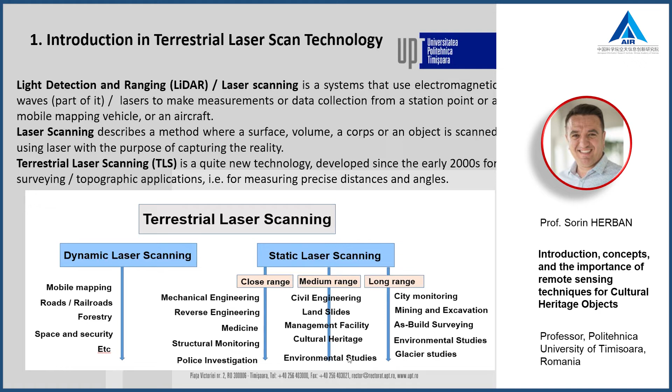And also we have long range, from a couple hundred meters to a couple kilometers. The application in long range are related with city monitoring, mining and excavation, as-built surveying. This as-built surveying can also be linked with building information modeling, and maybe some of you have some knowledge about building information modeling, environmental studies, and also glacier studies.

The principle of laser scanning is very linked to the electromagnetic spectrum. I know that in this part of the course the information is a little bit theoretical, but if you understand this theoretical information, it will be easier for you when you do applications with the laser scan. So please have patience, because it will not last too long. I wanted to give you some information about the theoretical principle of laser scanning.

Physics defines electromagnetic radiation as waves of an electromagnetic field propagating through space, carrying electromagnetic radiant energy. This includes all kinds of waves, starting with radio waves, microwaves, infrared waves, visible rays, ultraviolet, X-rays, gamma rays, and so on. All of these are part of the electromagnetic spectrum.

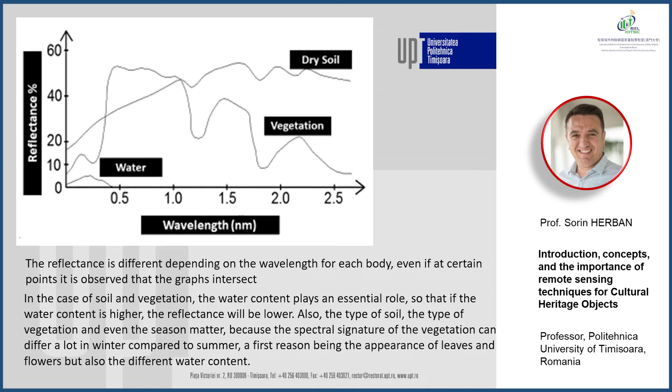So, what is laser? Light amplification by stimulated emission of radiation. Laser was created to generate a wave of light using only a very narrow band of the spectrum. As I told you before, a typical laser emits light in a narrow, low diverging beam with a very well-defined wavelength.

Worldwide, laser is known and it was demonstrated in May 1960 by Theodore Maiman at Hughes Research Laboratories.

Nowadays, lasers are used in a wide variety of applications, including scientific, military, medical, and commercial fields. All of these were developed since the invention of the laser in 1960. Actually, it was 1958 or 1960, I forgot.

Because of recent developments in ICT and sensor technology, light has been used in a number of ways to measure objects. This data-capturing technique integrated in scanners can be divided into categories: active scanners and passive scanners. Passive scanners, I will start with this one, do not emit any kind of radiation, but instead rely on detecting reflected ambient radiation. Most scanners of this type detect visible light because it is a readily available ambient radiation.

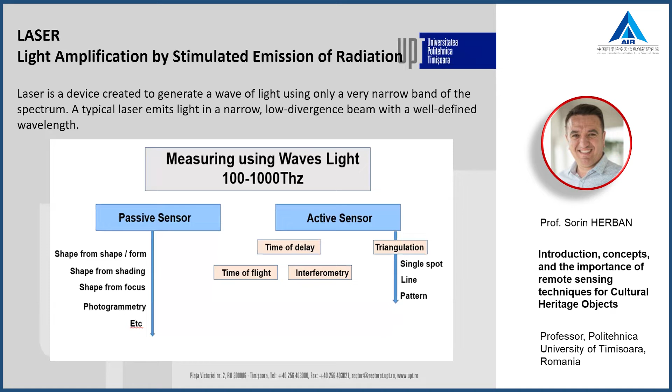Since these active measurement techniques require a laser transmitter and a receiver, they are at least mechanically more complex than passive sensors. The most common sensors integrated in laser scanner equipment are using time-based principles; these are active scanners that measure the time frame between two events. The advantage of using pulses for laser ranging is the high concentration of transmitted laser power.

This power makes it possible to achieve the required signal-to-noise ratio needed for high accuracy measurements at long ranges, from millimeters or centimeters or meters up to hundreds of meters. And nowadays there are scanners that achieve also a couple of kilometers.

The disadvantage is the problem of detecting the exact arrival time of the backscattered laser pulse, due to the changeable nature of the optical pulse and atmospheric attenuation. Active sensors emit controlled radiation.

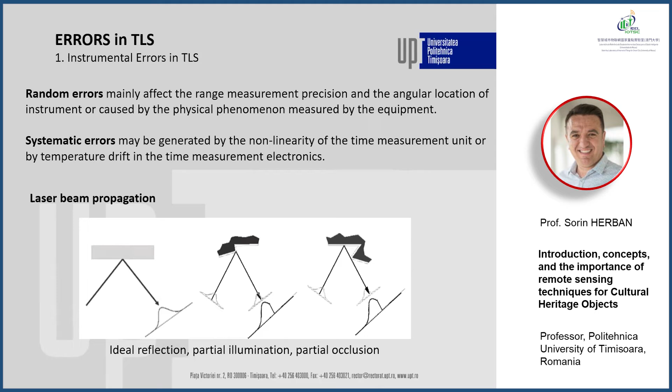First of all is laser beam propagation. Beam divergence is the laser beam widening over the distance traveled. Beam divergence has a strong influence on cloud resolution, as well as the horizontal position of a measurement point. Practically, beam divergence affects the angular location of the measured point, the apparent location of the observation along the center line that emits the beam.

However, this beam divergence can be corrected during the process of processing the point clouds.

Another error that is very common is the mixed edge error. One of the most important consequences of beam divergence is the mixed edge error problem. When a beam hits an object, it can split, or the beam can hit two objects located at different altitudes or different distances between the laser scan position and the object.

One part of the beam is reflected by the first object, and the other part travels further to hit another surface. The result of this can be imprecise information. This error is specific when working with high precision, like less than millimeters. It can also be corrected through the process of cloud processing.

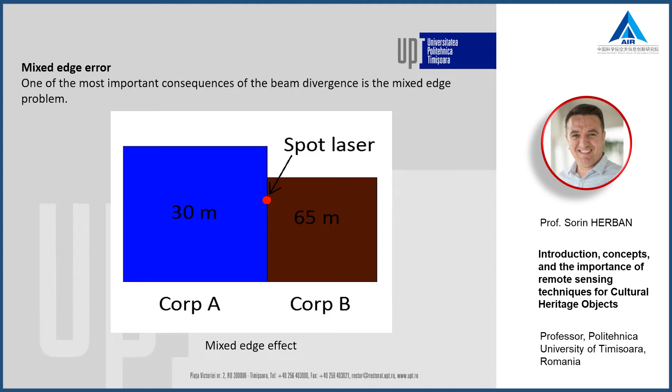Axes can also create errors in TLS. The process of scanning is defined by the following axes: vertical axis, collimation axis, and horizontal axis. Due to manufacturing tolerance, these axes are not perfectly aligned, leading to collimation or vertical errors, as well as horizontal axis errors that can also be present in the process.

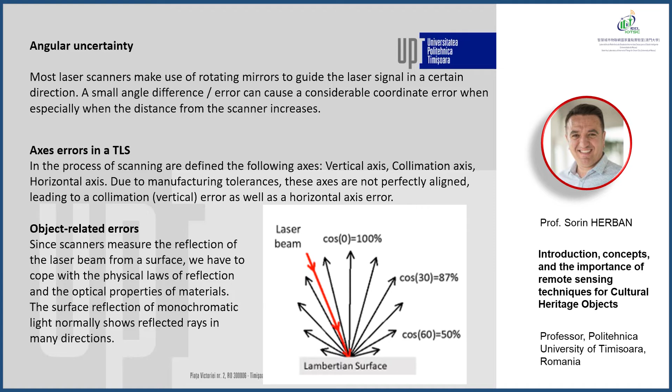Another category of errors relates to the object, or reflected errors on the object. Since the scanner measures the reflection of the laser beam off a surface, we have a couple of physical laws of reflection, actually two, and optical properties of material. The surface reflection of monochromatic light normally shows reflected rays in many directions, as you can see here, and we have the reflection of a Lambertian surface.

In nature, very black or dark surfaces absorb most of the visible spectrum, so the reflecting signal will be very weak in these cases. Hence, the point's accuracy will be corrupted by noise. Surfaces with high reflectance, like bright surfaces, give more reliable and precise range measurements. But not in all cases.

We have a case in my laboratory in Timișoara when we tried to scan an object made from inox or aluminum. In this case, because of the high reflection of the object, the point cloud was with a lot of noise.

The noise is the name of the, sorry, can you hear me? Murad Khan, if you can turn off your mic. Murad Khan. Murad Khan. Okay, okay.

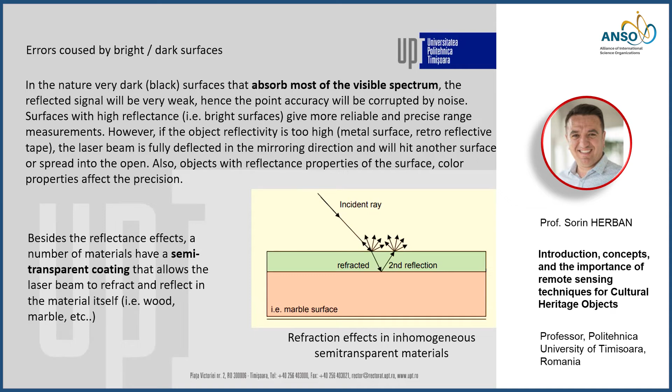Atmosphere can also influence the measurements, and laser scanners will only function properly within a certain atmosphere and temperature range. Even within allowed deviations, measurement errors may be observed, especially in distance measurements.

Laser light velocity strongly depends on air density. However, when the total station or scanner and the object being measured are not far apart, the atmosphere density doesn't affect our measurements much.

Interfering radiation: since laser scanners operate in a very narrow frequency band, the precision of range measurements may be influenced by external radiation.

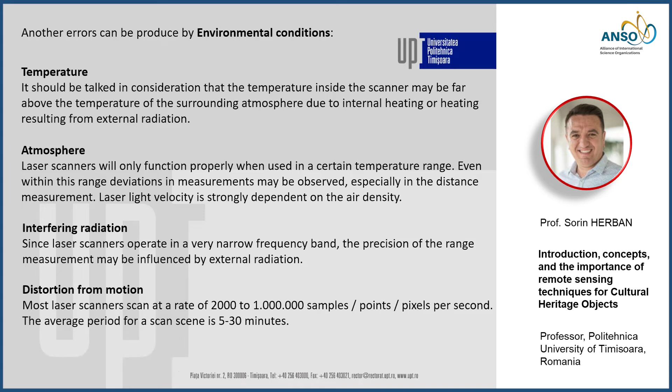Another aspect is distortion from motion. Most scanners have a rate of collecting points between thousands and millions of points per second. The average period for a scan can be taken between 5 minutes and 30 minutes. So all these errors due to the process can influence the precision and the model of the 3D object.

To understand better how we need to develop a process to create a 3D object, we have to keep all these aspects in mind.

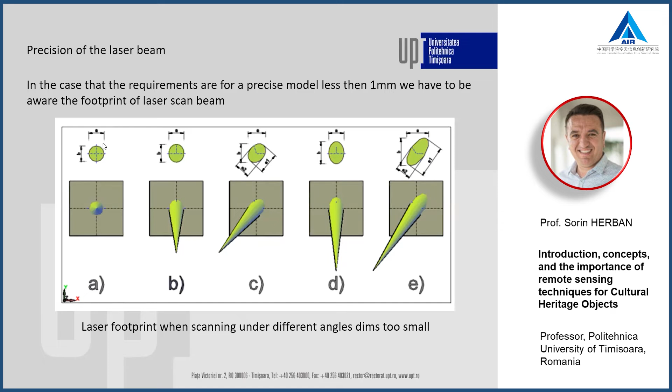In most cases, a single scan is not enough to produce a complete digital model. If we have an object, we need multiple positions to cover all the parts of the object to create the 3D model.

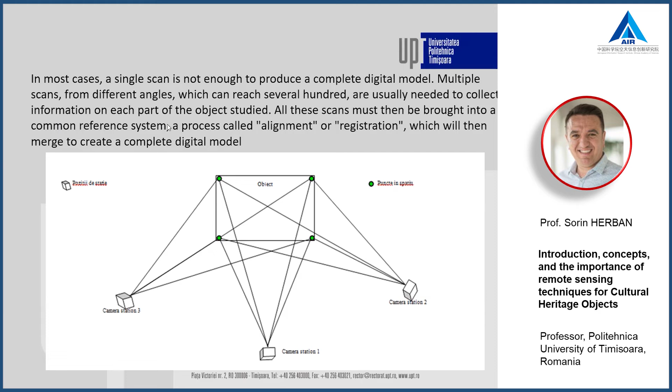All these scans must be brought into a common reference system. This process is called alignment or registration, which will then merge to create a complete digital model.

Categorizing registration techniques into direct and indirect registration, we need to keep in mind the following aspects. Direct registration means setting the TLS equipment into a base node point, like a traverse when using a total station. Direct registration techniques require a known network, require leveling according to the scanner, and require a georeferencing system or additional instruments like total station, GPS, and so on.

In most cases, we realize that the direct registration technique can be too difficult. So the latest way, or the fact that we are using laser scanning, is to register indirectly.

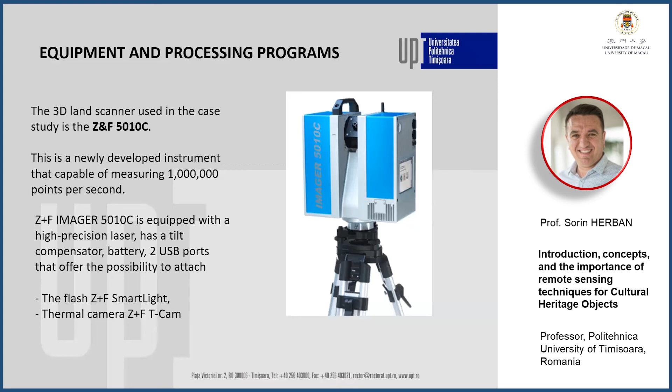It has a smart light and thermal cam slots, LEMO slots, which are used for thermal cam, smart light, and so on. It has a touch screen, a compensator, a Wi-Fi antenna, and this is the mirror camera.

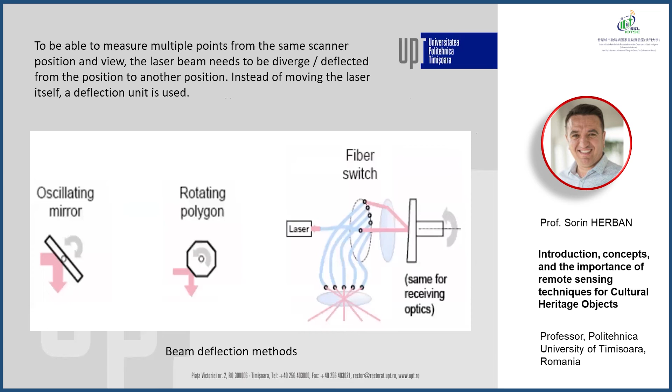We need a camera, or digital camera, because the laser scan is taking information, these dots. We will have all these dots about an object, but especially in cultural heritage and environmental research domains, we need color for these points. I use the word capturing the reality - if we use just a laser beam, it captures the X, Y, Z coordinates of the object, but the laser beam isn't capable of collecting the color.

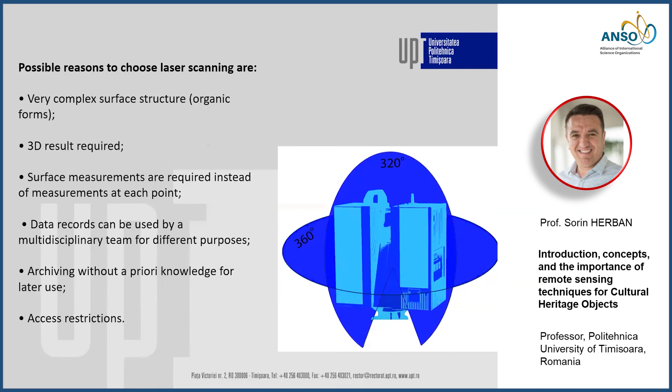So for all these dots to be colored, we need at least a camera and then a process so that all these dots can be colored. That's why we need a mirror and camera. This instrument provides full HDR panoramic images up to 80 megapixels from one scan, which is quite a lot.

I also share with you some point clouds, and I invite you to download these point clouds and your program. You're going to see in my third presentation some steps you have to follow. The first part of my presentation is about CloudCompare - it's an open source program, and I invite you to download it for future applications.

I'm sure that the Python programs are working with point clouds. So if you already have installed some Python-based programs that deal with point clouds, please feel free to download the data and work with it in your Python program.

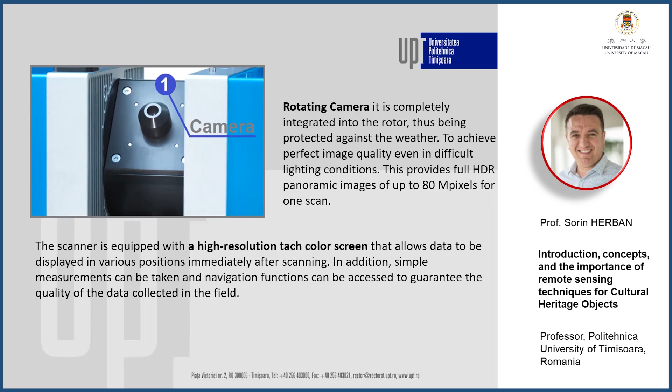What are the Zoller+Fröhlich 5010C characteristics? It has a laser scan class 1 with wavelength 1.5 microns, respectively with a measuring range between 200 meters and 0.3 meters. As I said before, the rotation speed captures 1,000,000 pixels per second. We can choose the resolution and quality of different levels, and these can be combined.

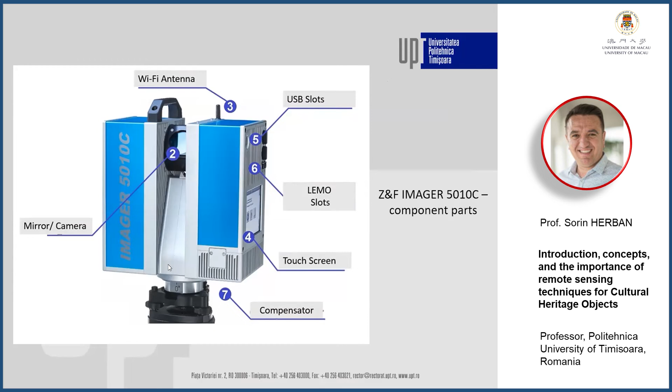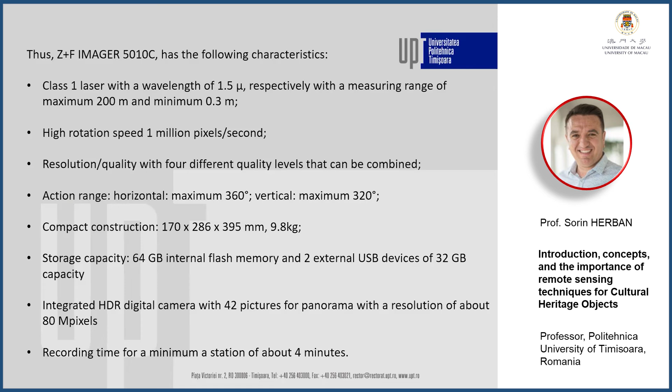It has a horizontal field of view of 360 and vertical of 320. Why? Vertical is 320 because it has these edges on both sides and cannot measure under the equipment, but the range is quite high. Of course, the information placed under the scanner can be measured from a second position, so it's not a problem. We have a quite big storage capacity, and a full process of scanning takes about 4 minutes.

Also, for registration, if you remember, I told you that we have direct and indirect registration. From the indirect, we have two procedures: cloud to cloud. This scanner can do cloud to cloud, but in that process we don't have too much access to the parameters, so we use targets - these kinds of targets - to have control over the registration process.

In indirect registration, we have manual and cloud to cloud. These targets are used for manual registration, and you can see these targets have a number. This number is important because from two different scan stations, we have to choose the same target. What you have to know is that we need these targets in the surrounding environment to register two scan positions that have to be linked together.

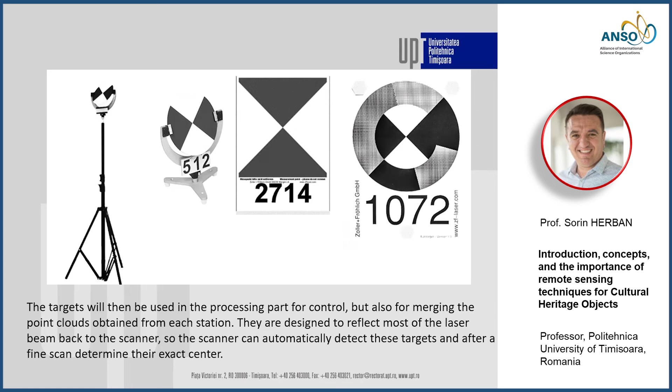I will present a cultural heritage application in Timișoara and the process of registration, or the process of bringing different scans into the same system.

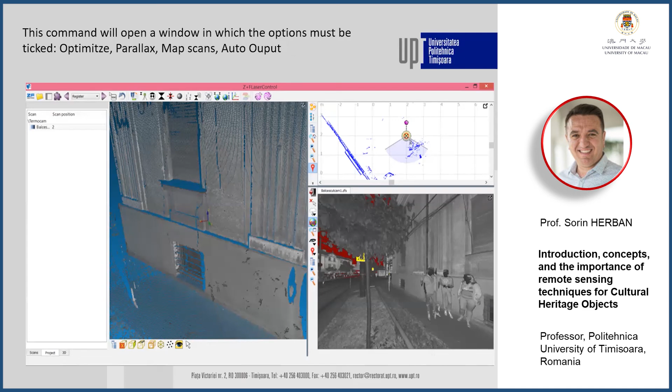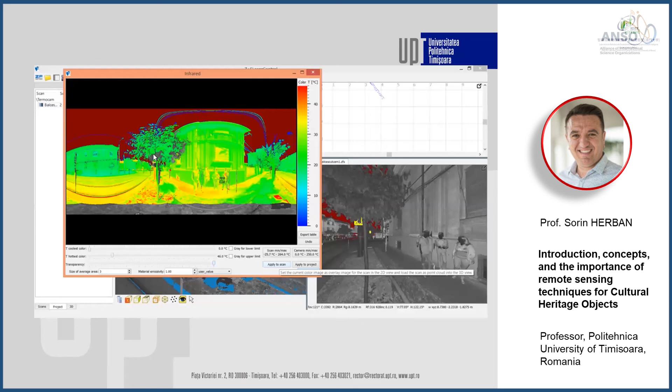So the data, all the points will be colored. Then, because we have a thermal data acquisition station, we generate a thermal camera scan of the project. Okay, this is the thermal camera of the project, with infrared, yes?

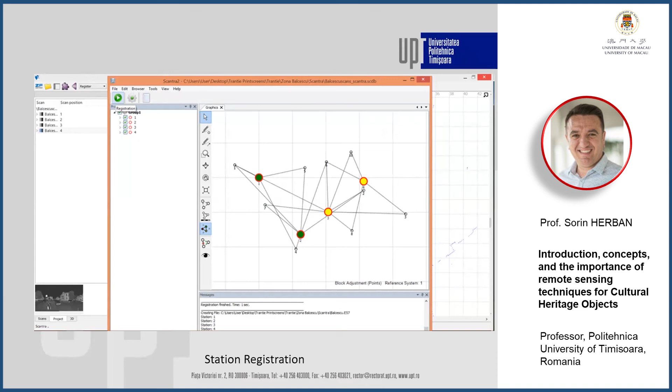After that, the next step after we color and generate the thermal camera, is the registration process. Registration process means that we link all the targets between the stations. The targets that are used are paper targets. Yes, this is a paper target glued to the surrounding environment. Yes, these targets have to be linked between two stations.

Okay, so the process of registration can be semi-automatic. Semi-automatic means that we are using the targets defined in the process, yes? Or this process is related to when the program automates the center of the target, and this one is named... As you can see here, this information has to be placed by the operator in this field.

The non-automated, if you can see here, it's not right in the center. Why is it not right in the center? Because the image looks very well, but maybe we didn't choose a process where the dots are hitting the center of the target. So sometimes we need to choose the manual registration, and we will place it right in the center of the paper target.

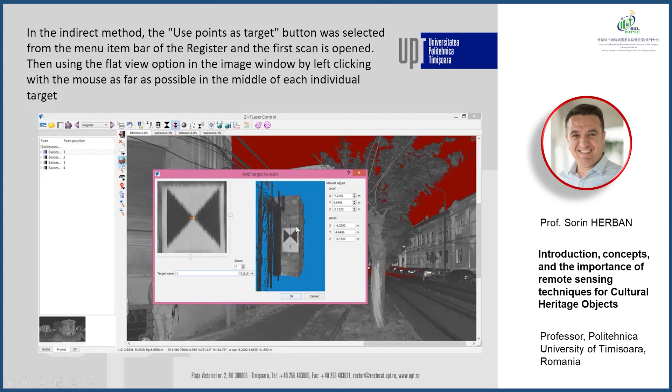We use this point like a target. After we defined all the targets in every scene, we merge the different scenes that are linked by the name of the target and the target itself. Finally, we will have scenes like Bălcescu 1, Bălcescu 2, Bălcescu. These are the scenes, and these are the targets. We link the scenes between the scenes and the target, and finally we have the report.

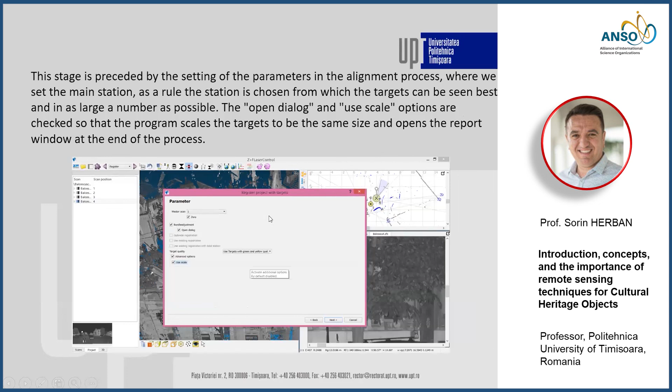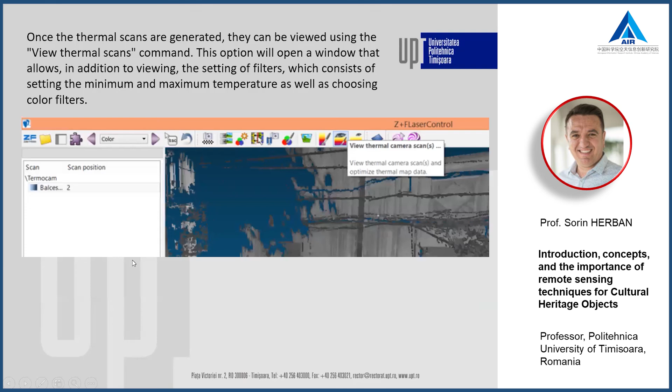I would like to mention and pay attention to this report, because it gives you critical information about the 3D model. In this case, the average deviation was less than 2 millimeters, and the maximal deviation was 2.5 millimeters. If the degradation of the cultural heritage object is at this stage, that precision is excellent.

If we are talking about a metal or steel structure, things will be different, because in those cases the precision has to be less than 1 millimeter. But in this case, this precision is perfect for us. So we move to the registration process, and finally all the scenes are brought into the same coordinate system.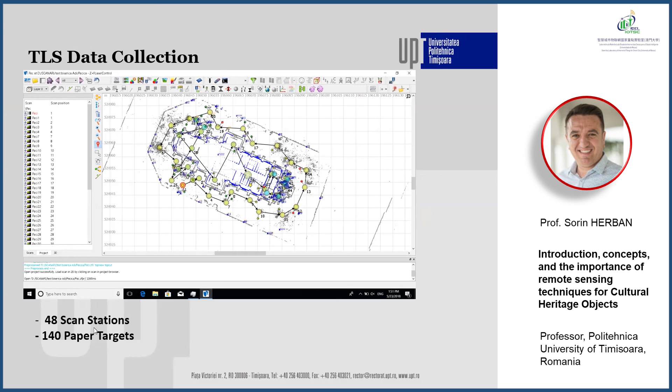We had an application at a church in our area, and the demand of our beneficiary was to have a model outside, inside, and also in the attic, under the roof, with all the beams. So we used digital photogrammetry data collection combined with terrestrial laser scan data collection. We had 48 scan stations and a lot of paper targets.

We saw the errors for the 48 scan data collection. We have very good precision.

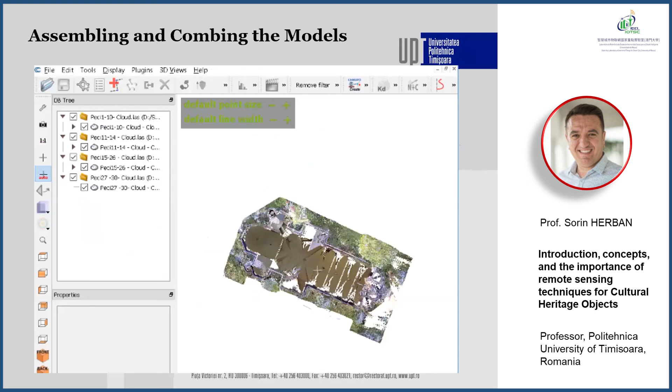We have very good precision, and in the end, we chose colors to show the beneficiary the precision we worked with. We colored the point cloud gray, while the digital photogrammetry kept the same color as reality, so you can see the interference between the point clouds.

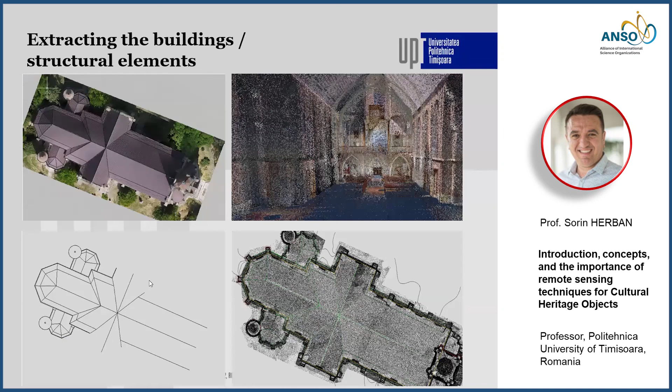These are the point clouds made with digital photogrammetry, and the gray ones are from terrestrial laser scanning, and all these points reflect the same object. In the end, we extracted all the data from outside and inside. Let me open another file with you.

It's starting, the software start. Okay. Not working. I'm on my laptop and the program is not working. I will start again, just give me a few seconds. Sometimes we need to have patience with the softwares, and I know that all of you who are working with software are dealing with big files. Okay, now it works.

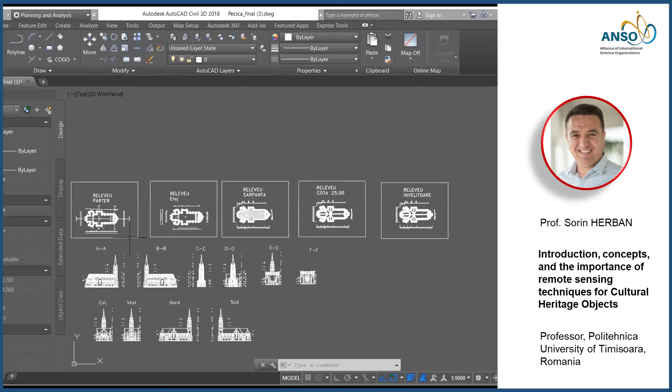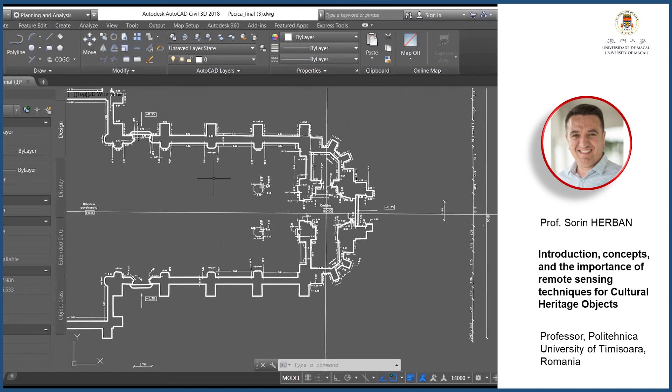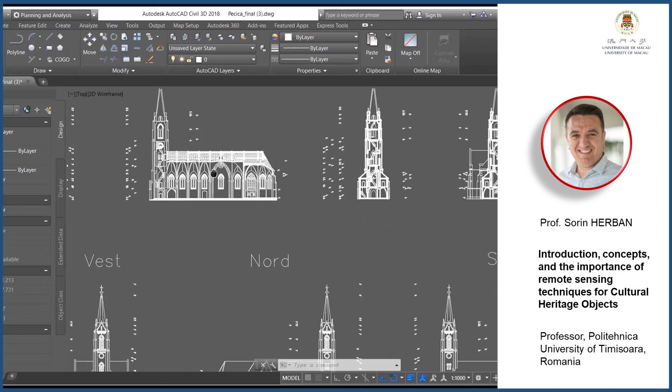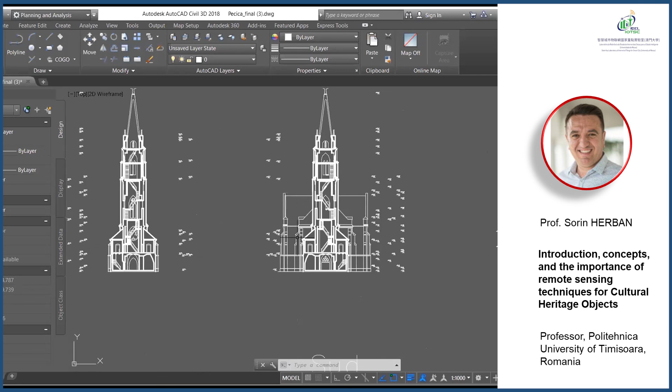So from that 3D model, we extract all the structural information. I hope you can see my Autodesk Civil 3D program on your screens. This is a section, because you can see all the beams in the attic. Yes, everything. So to extract all this information, definitely we need a model inside and outside. A section, front section. The architects can now come and put the colors and everything on it.

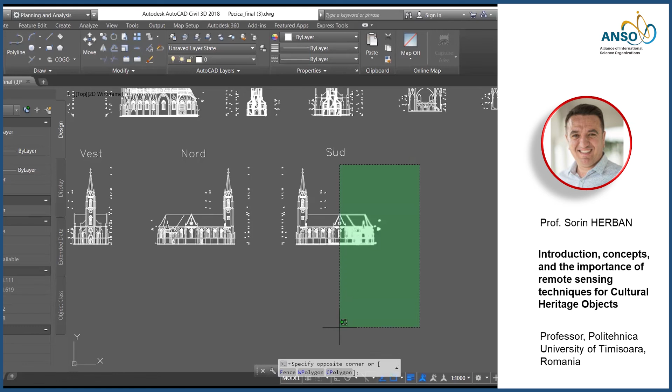So this is what I wanted to show you. Okay, stop share. One more minute. Okay, share.

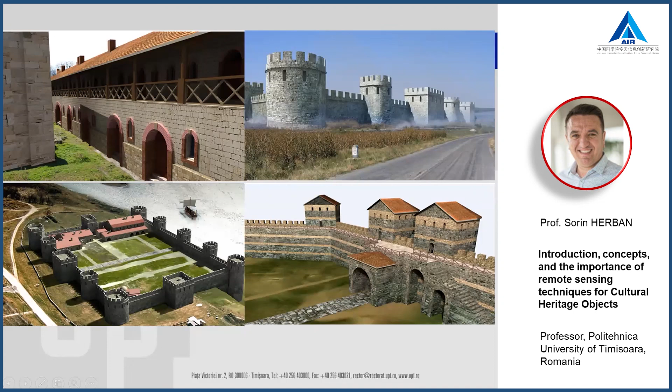You have all the information in the platform. You have my email, and if you have some questions, don't hesitate to write me.